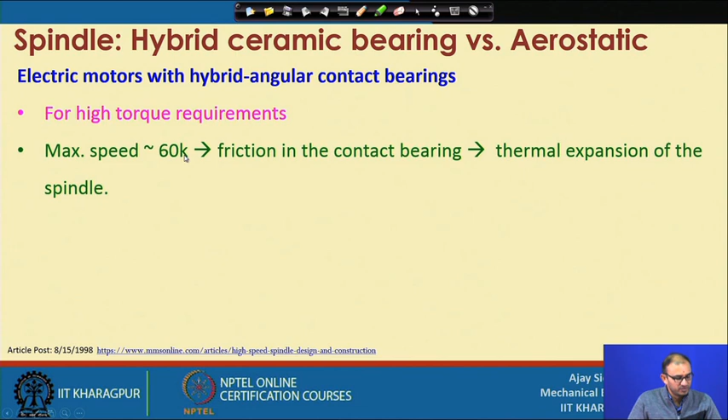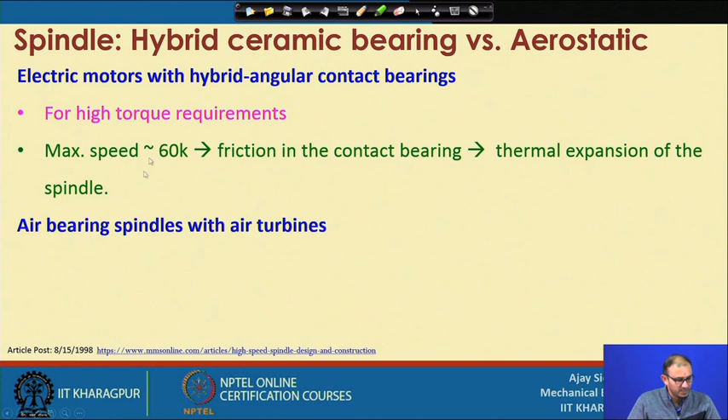The issue here is that we can mostly go up to a maximum speed of 60,000 rpm, because even though there is less contact, there is still some contact. Whenever there is contact, be it line contact or point contact, we always get friction, and that friction in the contact bearing creates a problem when we go with rpm more than 60,000. The problem becomes related to thermal expansion. The thermal expansion of the spindle will occur, and because of that you may not get the required accuracy in the machining process.

What are the advantages here? You can go with a speed of 2 lakh rpm, even spindles up to 5 lakh rpm. It's still under research, but somebody somewhere reported they have already made this type of spindle that runs at 5 lakh rpm. But it produces very low torque, because when you go with extremely high rpm, you have to sacrifice torque. Still, that torque is enough for micro machining operations, because our depth of cut is very small, we use a very low feed rate, and our rpm is very high. So in this case, low torque should not be an issue. We can use aerostatic bearings or aerostatic spindles for machining different kinds of materials.

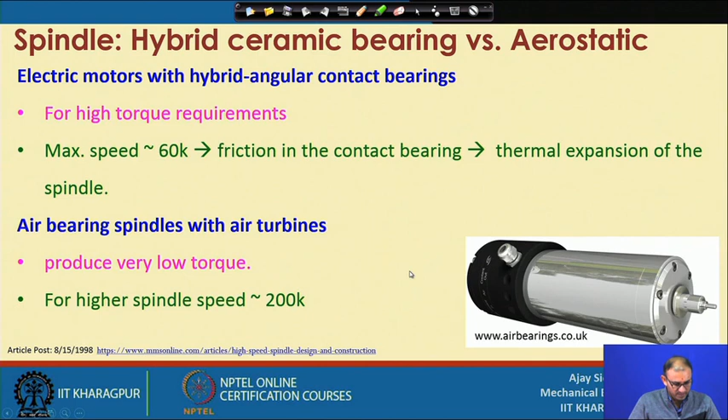So this is the most often used spindle for high precision machining tools, mostly called aerostatic spindle. Why is it used? Because it has high motion accuracy and is capable of high rotational speed.

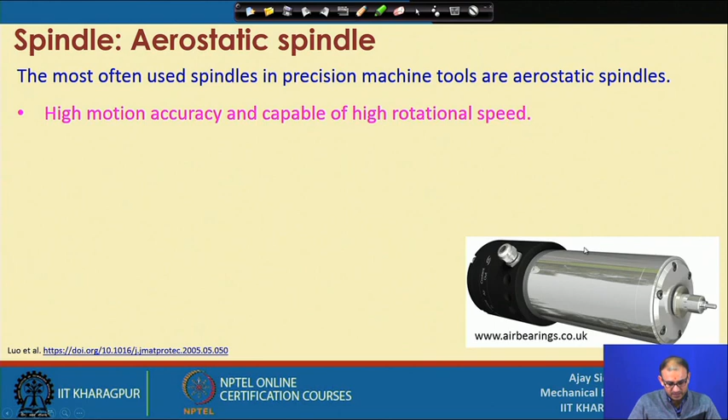We have seen that because of that air film, you are not able to get any contact between the two relative motion surfaces, and because of that there is no wear and tear of any components. You can go with a speed depending on the supply of air and the other accessories attached with the spindle. So your requirement for high rotational speed is fulfilled by this particular aerostatic spindle.

It has lower stiffness than the oil hydrostatic spindle, because there the oil is highly viscous, so you can play around with very high stiffness. But that low stiffness is not really an issue, because it has much lower thermal deformation than the hydrostatic spindle. This is one downside of this spindle compared to hydrostatic, but generally we do not go with the hydrostatic spindle in high speed machining or micro machining centers, because its load carrying capacity is very high, but in our case that is not an issue.

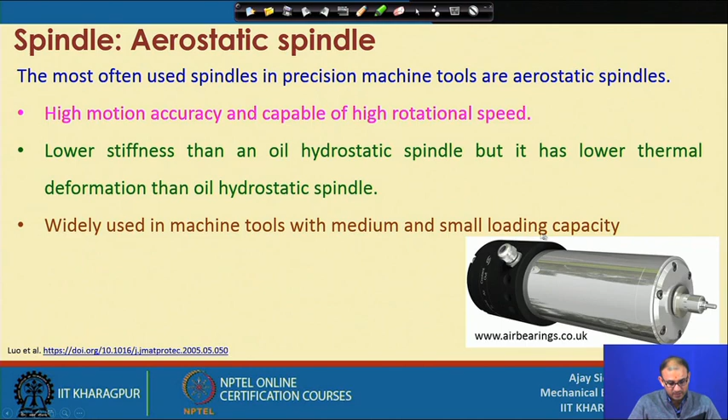So it is widely used for machine tools with medium and small load carrying capacity, because that is where our micro machining field fits in, since our load is not very high but considers medium and small load capacities.

Now let us see what things are there inside it. This is one particular aerostatic spindle, and the tool is attached at this location. These are the different openings by which you can supply the air, and other than the air supply you also have to apply cooling in some locations. So you get different parts, as well as an electrical connection. Some of these are the wires for rotating the motor, which is actually built inside this particular spindle.

This is the circulation channel or passage for the air supply. Here you can see the air is actually going up to the nose of the cutting tool holder. It is also possible to cool this area or create some type of sensing element here, and this remaining part is given for the air bearing, which is located at this location.

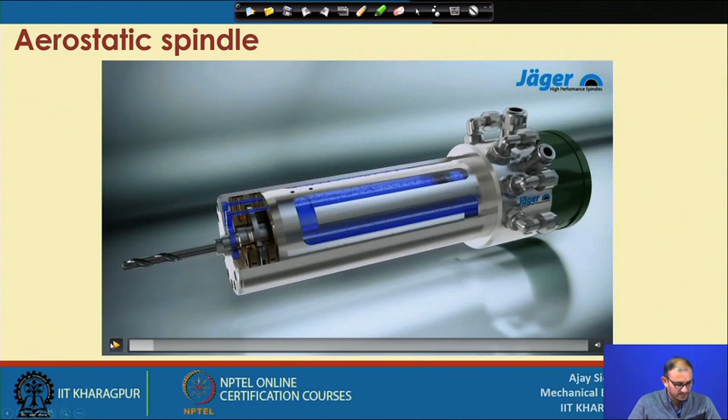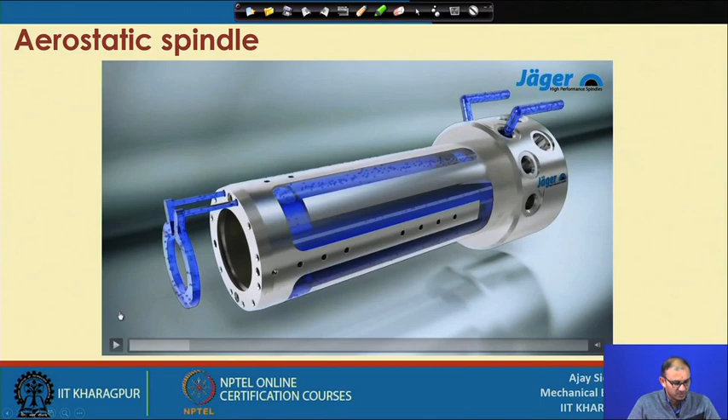So you can consider this as a closed loop continuously, because you can see you are not actually dispensing this air into the atmosphere. In one direction, you can say this air is going inside the system, and in the other way, this air is going outside the system.

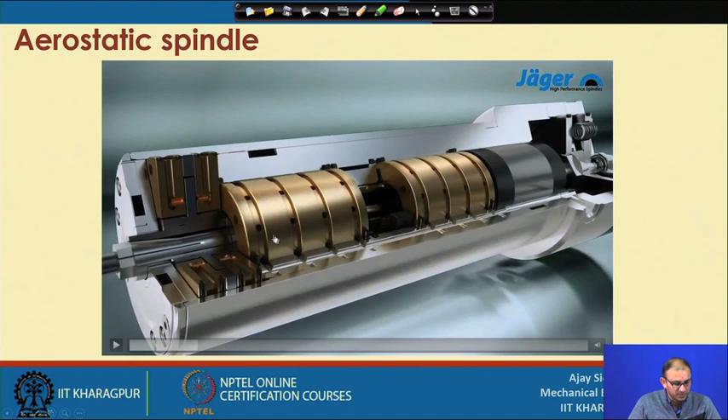Now you can see you will not find any type of ball bearing or any other type of bearing, because this bearing is an air bearing. So instead of balls and other things, you will get some passages here, through which whatever air is coming into the system will pass through these particular sockets or passages, and then it will create a uniform pressure around the shaft.

So this is the passage for air. Now you can see air is going through these particular passages, and wherever there is an opening, through this opening it will enter radially towards the shaft.

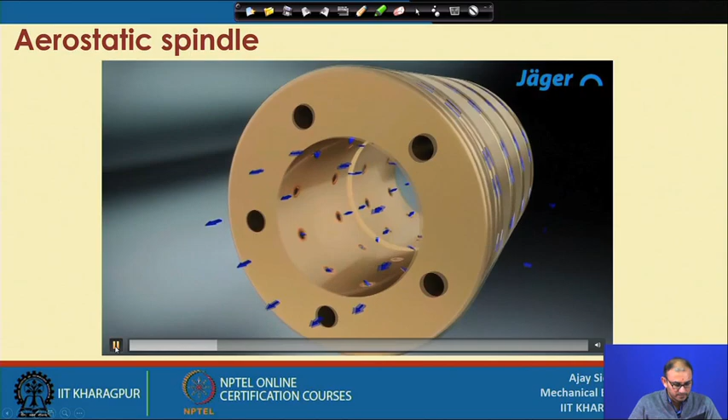This is the inside view, and you can see here this is the inlet and this is the outlet, meaning it is a vent. This vent again goes through this particular outer periphery, and then it is collected through that pipe, which was shown a few seconds before.

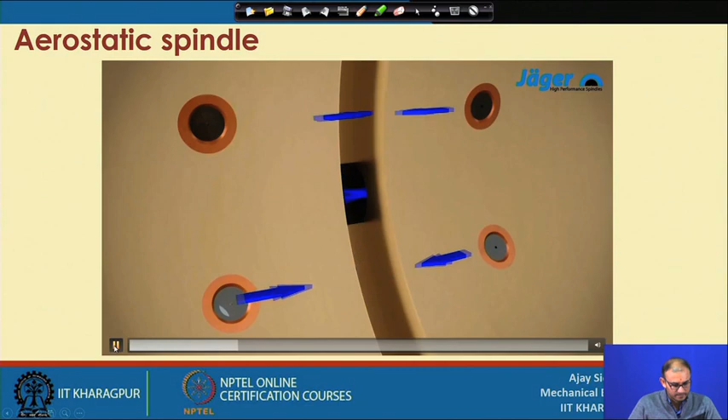So this is the side view. Now, as we have seen a few lectures before, it has very high radial stiffness. Suppose your tool is located here at this location, and you are getting a force from this direction, so you are moving in this way. So you are getting force here in this direction.

So when there is a force, now you can see right now whatever air is coming through has the same color, meaning blue color, so it has the same pressure on both sides, the top side and the bottom side.

Correct. So it does not have so much variation, but when it is under operation, you may get a radial load in different machining operations. So at that time, what is going to happen?

Right, so now load is increasing in this direction. Now you can see whatever air is coming from this location, it is in red color, that means here you are not getting enough area.

So we know that pressure equals load by area. So here area is reducing, because of that your pressure is increased in this location. But when it is going down, you can see that here area is increased, so because of the higher area...

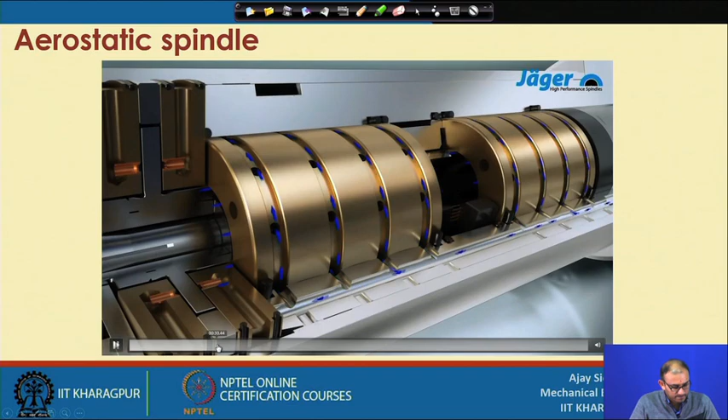Right, so because of that problem, what is happening is that you will get... because of that again the shaft will go to the central position, again it will try to stabilize the pressure on both sides.

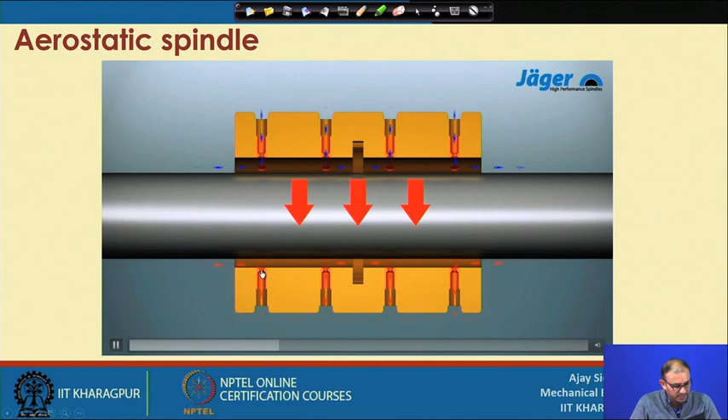So this is the top view, that means from the bottom of this cross section - it is an axial cross section here. So again if it is from this lower direction, your shaft is moving towards down, then your pressure will be different here.

So on the upper half there is low pressure and lower half there is high pressure. So whatever these red color syringes or nozzles are showing, this will create more amount of pressure here, and this blue color has less pressure.

So because of this pressure difference, again your particular shaft will be in the central position, so that you can avoid this particular pressure difference.

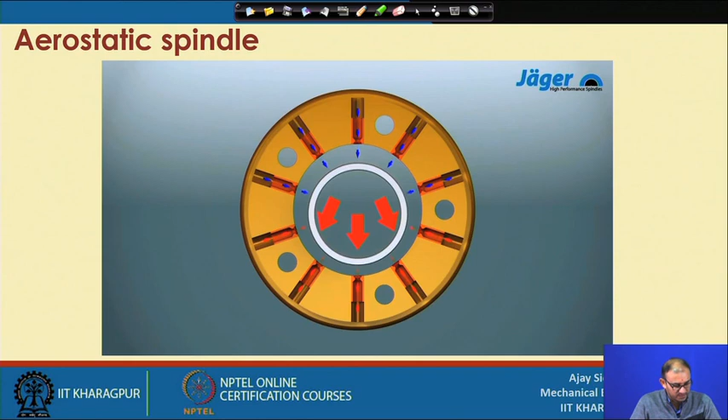Correct. So this is the way actually you will get the radial stiffness, and we know that this radial stiffness is very important when you do a milling operation.

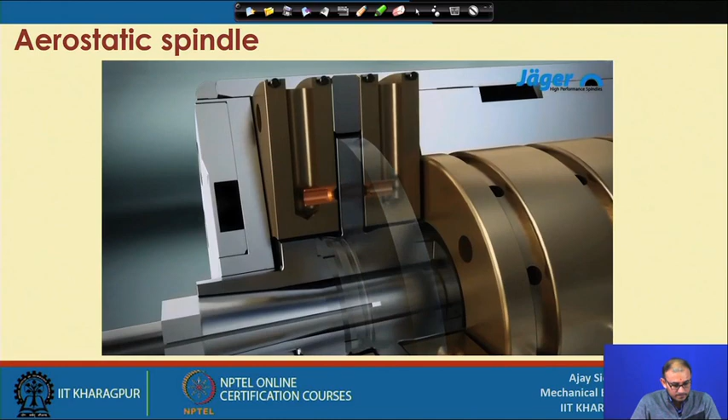Now we have seen here that it was radially aligned, so radial stiffness was very high. Now this is about the axial stiffness, because when you want to drill something, you are plunging your tool into the workpiece. So it has an axial movement in this direction. Let us see how it will compensate for the axial movement.

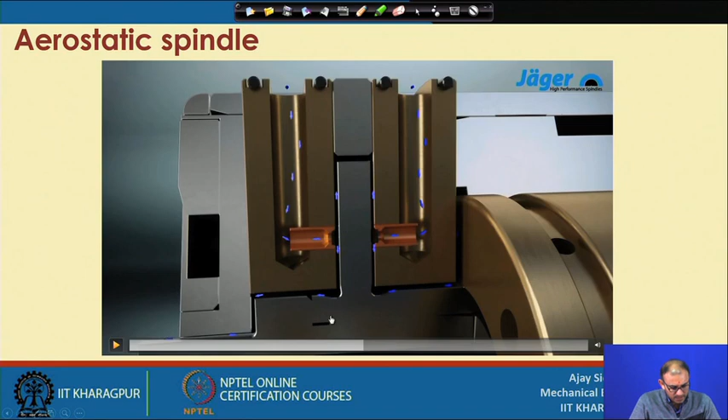Now see here, this is the thing which is attached with the tool holder. So this is part of the system which is coupled with the spindle system, and this air supply is coming from here, and then it is dissipated from these two directions, right.

So this is the open position where the air is actually creating a film between these two systems, on the spindle side and on the tool side.

So now we have to say that when this particular component moves to this side, right side or left side, depending on that it will again destabilize this - that means there will be a pressure difference similar to what we have seen just now for the radial direction. The similar thing will happen in the axial direction also.

Right, so now the tool is moving down, at that time you can see that here the gap is less now. So your pressure is very high in this direction compared to this right side, so left side pressure is higher than the right side.

So again it will stabilize, and now if it is moving on the right side, again pressure will be higher on the right side and less on the left side. So again it will be stabilized at the center.

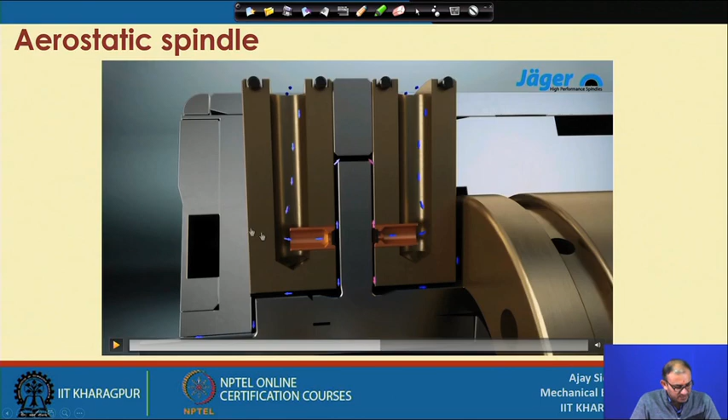So this is how it is happening. This way you can control the axial stiffness also, that means wherever there is axial loading or radial loading variable, at that time you can compensate those things within the system without actually damaging the component of the bearing as well as spindle.

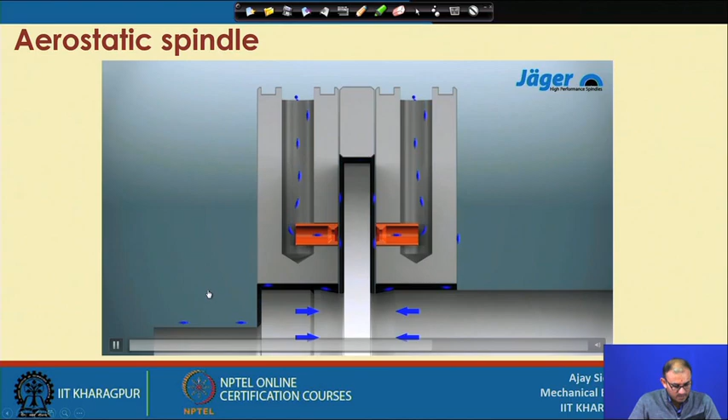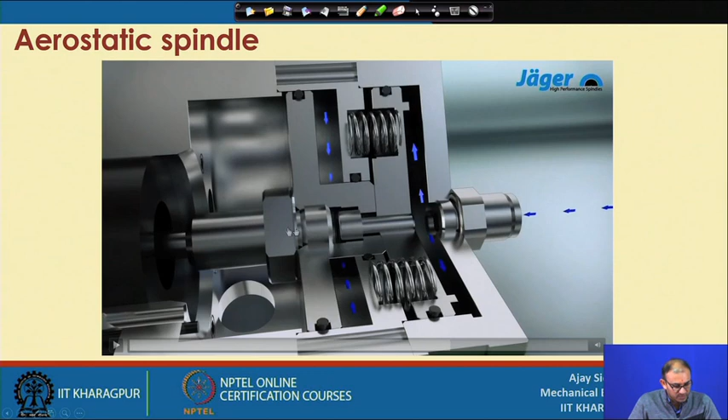Correct. So, this is the way it works in this case. Now, this is the drawbar mechanism, because in the drawbar mechanism you can actually see these two springs which make sure there is uniform pressure when you are holding or releasing the tool. So, when it is pressing this particular drawbar, this is the drawbar and this is the plunger which is pushing this part.

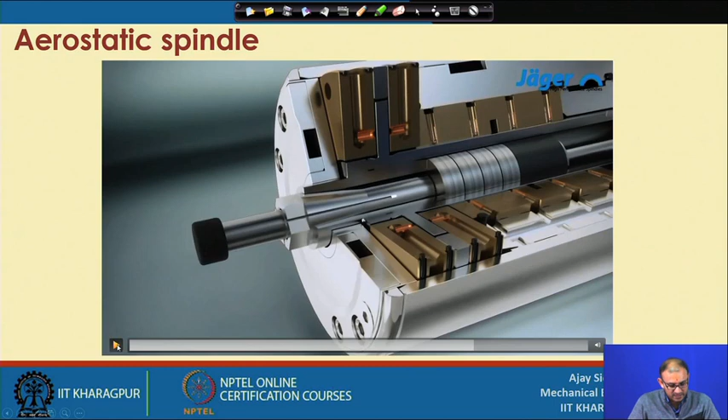So, when it is pushing, at that time it will release this particular gripping, and it will be expanded, and then you can remove your tool from this location. So, this is the expansion, and then you put it again and release that plunger back to the original position. So, again it will grip this, and this particular thing will be gripped with a different tooling system.

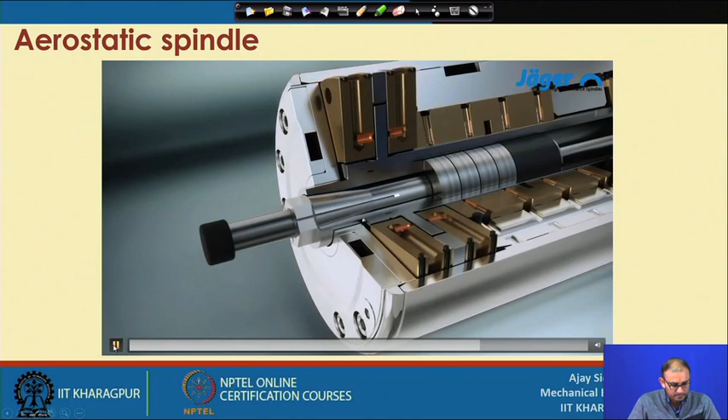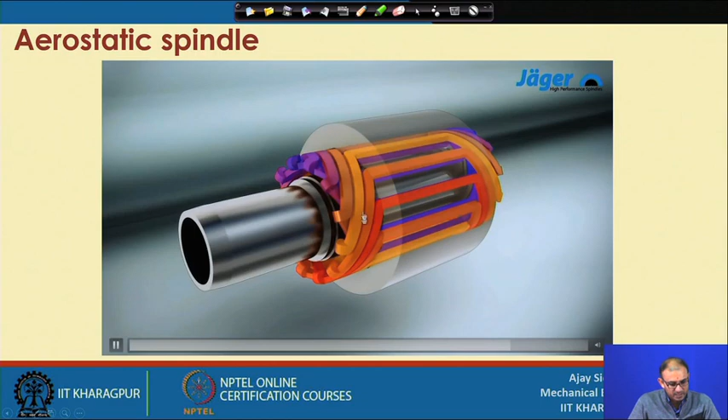And this is the motor, because we know it is an integral motor type of spindle, you do not have an external motor passing through the belt drive. So, here this particular motor will give you a rotational motion.

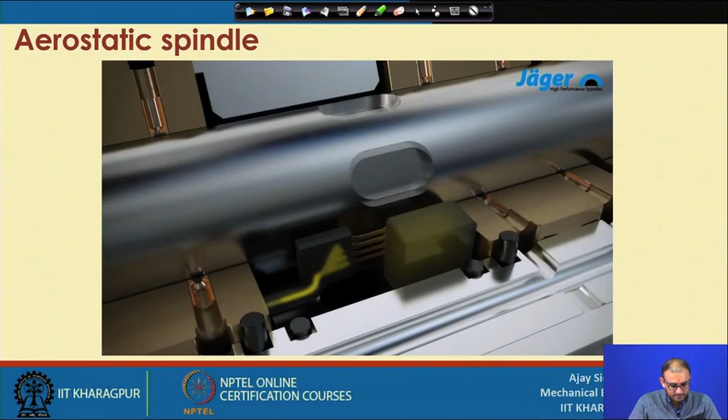Right. So, this is all about the aerostatic spindle. But there is still one problem in the aerostatic spindle also, that is called spindle warpage. There are a lot of passages through which air is coming.

And this was the shaft. So, air was coming from this. Now, consider when air is coming, at that time we know the shaft was in motion, that means it was in a rotational direction. So, the shaft was rotating in one direction or the other.

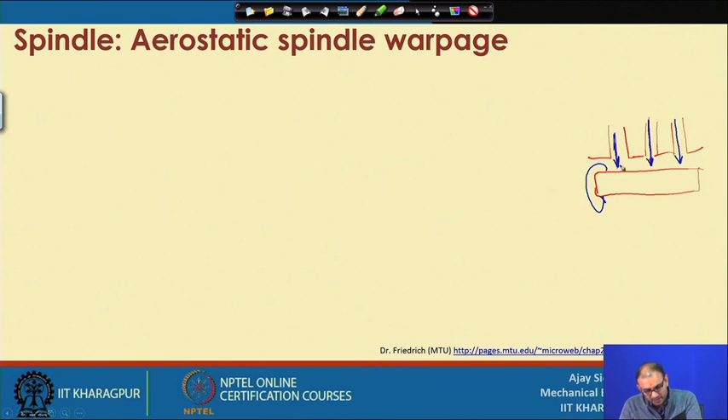So, wherever this air is plunging or striking, the surface was variable, that means every time it is getting a new surface here, and whatever air we are using here, this air is very cold and compressed, because we need completely dry air without any type of water content or something. So, mostly it is cold and compressed air that is coming.

So, when it is striking continuously onto the spindle, what is going to happen is that this particular area will become very cold. So, these are the cold spots.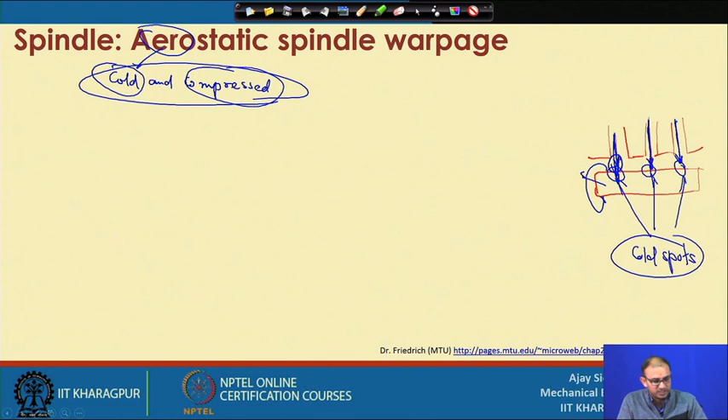If that is the case when the spindle is not in rotation condition, it is not rotating, it is in stationary condition. So, let us see what things will happen and how this warpage will create a problem, that when the spindle is motionless for a prolonged period with cold air impinging onto the same location, that is what is happening here. So, at that time, the differential contraction among the locations in the spindle takes place, causing the spindle to warp.

Because of that, let us talk about the single case only. So, our air is coming from this, and this is our shaft, right. So, it is continuous, it is not rotating.

So only this particular location is under very low temperature, rest of the thing is mostly stabilized, because whatever temperature you are using for the system, that will be the temperature of this particular shaft, since we are not rotating it. So these type of points are many, because if you consider 360 degrees and put 8 or 9 points, at every point your shaft will be under this type of temperature difference, and remaining portion will be at the same temperature.

So that is what we are looking from this part. If you see this particular thing lengthwise, we are putting one point here, this is the other way, and this is probably the third way. So this particular portion does not have temperature variation, but these are the portions where you will get temperature variation. So because of the large variation in temperature at different locations, what is going to happen is that your spindle will warp.

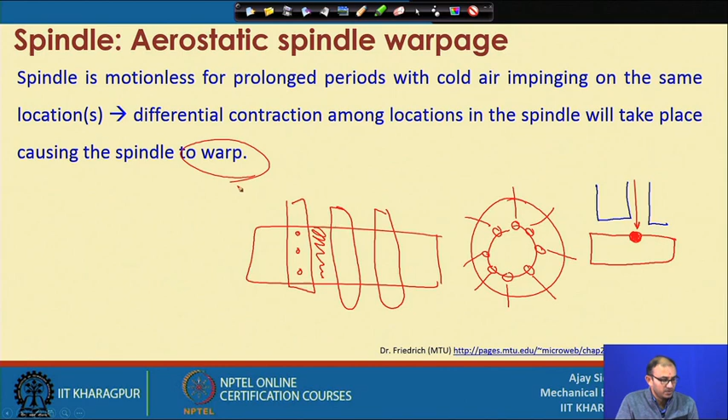So what is the problem because of that? Out of roundness motion due to the bending of the spindle, because we know that when making an aerostatic spindle, the dimension control is very tight. So if you continue with this, you are not getting a straight shaft, meaning you are not able to maintain the dimension of the spindle. At some locations you will get out of roundness motion, and also a localized reduction in the size of the spindle, which will alter the interior clearance and stiffness.

So because of that, because you are localized cooling it - we are not heating locally, but we are cooling locally - and the remaining portion stays at system temperature, you are getting temperature variation. And we know that the thermal coefficient of expansion is different for different materials, and that plays an important role in how much expansion or contraction occurs per degree centigrade change in the system.

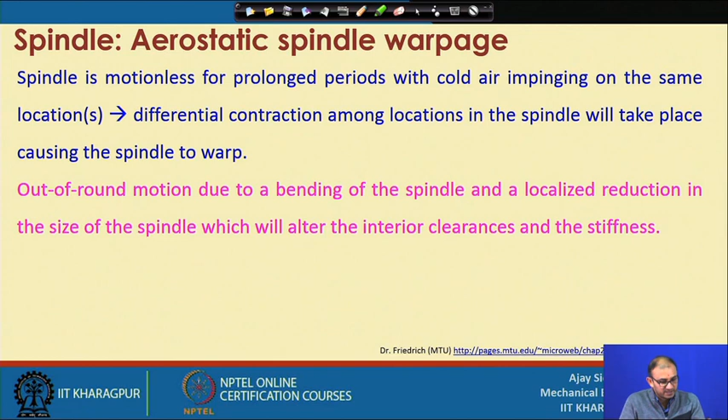So what should be done in this case? Suppose your idle time is very high, meaning you do not want to use the spindle for a long time - then it is better to shut off the air supply. And if your idle time is not very high, then you can actually provide a very small amount of rotation to the spindle. So you continue the air supply, but rotate the spindle at a low RPM even without doing any operation, in the case where idle time is low.

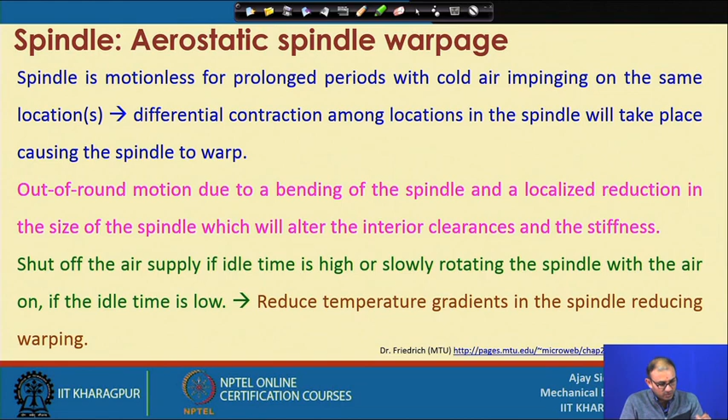So in both these cases, what you can do is actually reduce the temperature gradient in the spindle, and reduce the warping of this particular part. So that is one thing we have to take care of during the use of an aerostatic spindle for different micro machining operations, because even a few microns here and there will play an important role or create a lot of problems in the micro machining features.

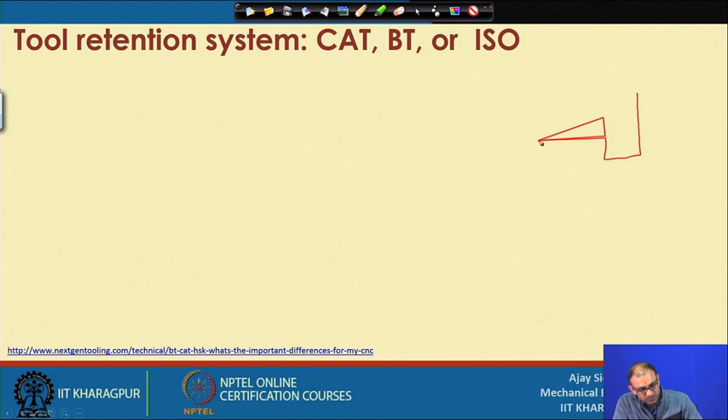Now coming to the tool retention system - what is the tool retention system? That means once you hold this particular part, now we know we have all the things, that is the bearing is also there. So this is the system, and this is the tool holder, and this is our tool, correct.

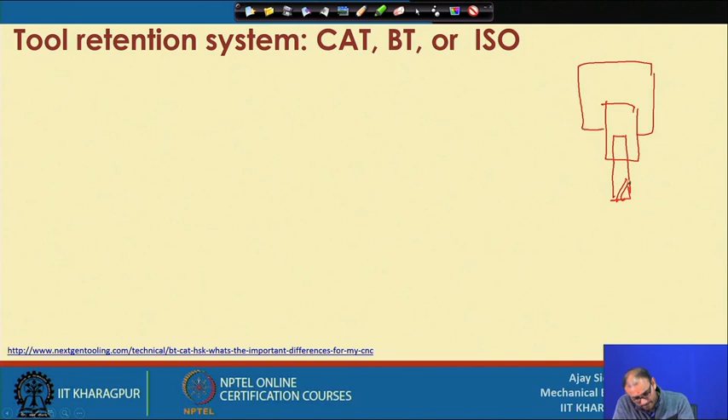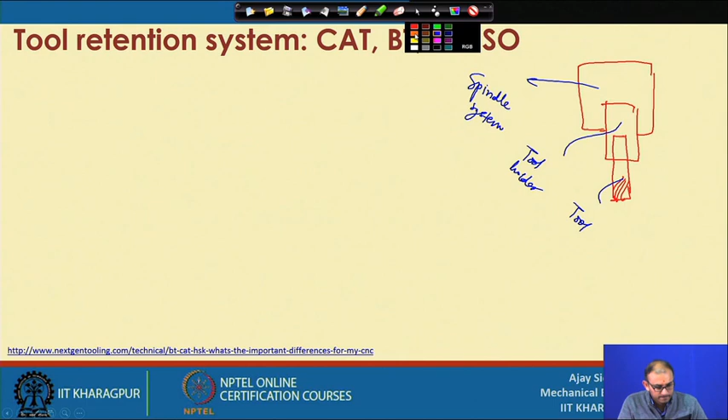So now there are three locations where we need a joint. Let us consider this is the spindle system, this is the tool holder, and this is the tool. So what things are there? This is the one joint where the tool is actually gripped inside the tool holder, and the tool holder is again actually inside the spindle system.

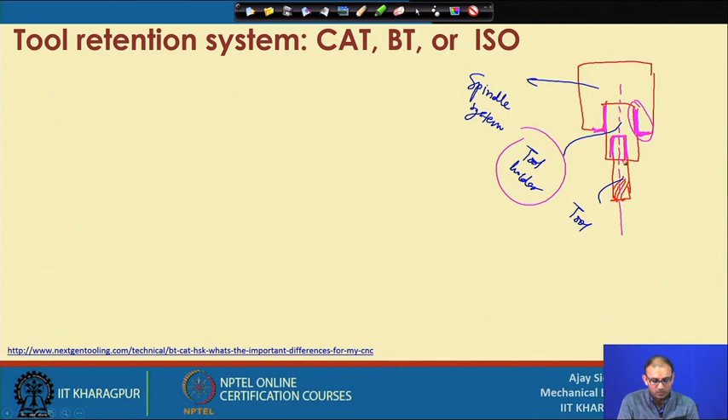Now what is the run out of this particular thing - that also creates a problem for the precision or accuracy at which you are holding this system. Now if you consider that this particular thing is exactly concentric, meaning this is the axis of the spindle system, and you are putting the tool holder in that, both things are matching - but from tool holder to the tool it is not matching, then you will get run out, the tool run out. So in this particular case there is a problem.

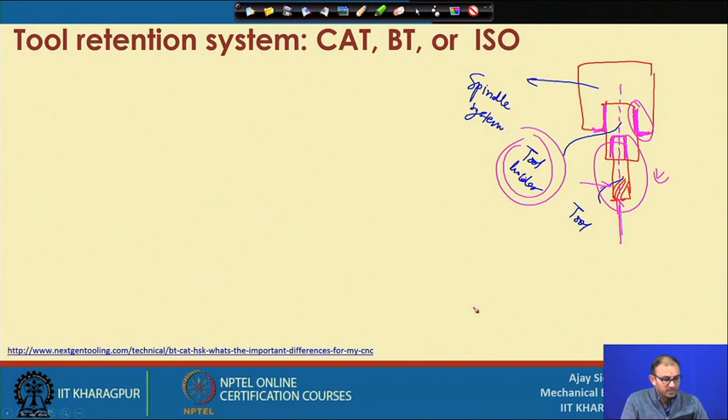Even if both things are working fine, there can still be a problem in the tool holder fitting into the spindle system, causing a large amount of tool run out. How accurately you fix this is one issue, and once machining starts, you get different types of forces in different directions, so how the system behaves under dynamic conditions matters. How perfectly you grip the system from spindle to tool holder, and tool holder to tool, determines how accurately you can make a part with dimensions in tens of microns. Let us see the different types of retention systems, to understand which is better for micro machining.

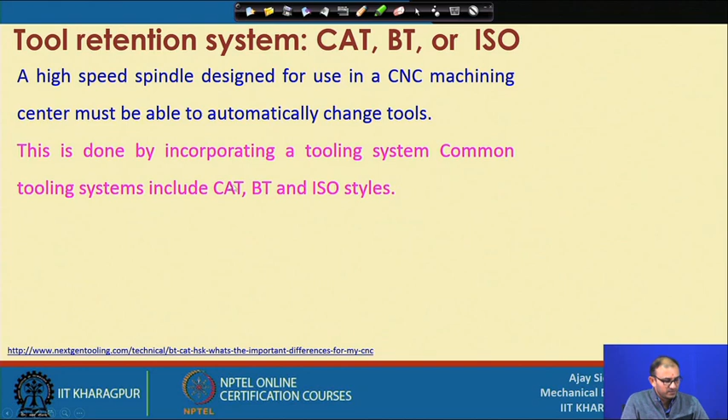This is the CAT, BT and ISO system, a very routinely used high steep taper and high speed spindle designed for use in CNC machining centers, which must be able to automatically change the tool. This is needed because we often require a tool change to create different dimensions or features onto the surface. This is mostly done by CAT, BT and ISO, three different standards by which it is defined, and these are well known.

So there is a high steep taper. Here, the whole thing is actually such that your spindle is located at this location, and it also has a taper. This taper matches the tool holder taper, and then it is pulled by a stud. This way you get the insertion of the tool holder, and the tool is attached at this location. These are the CAT, BT and ISO type of standards.

Generally the taper is 7 by 24. What is this 7 by 24 taper? Suppose you have a length of 24 inches; within that 24 inch length, the taper is 7. So consider this L is 24. Whatever taper you get here, this taper is 7, so this is 3.5 here, 3.5 here.

From this you can consider this is the part, this is the spindle, and the total length is 24 with a taper of 7, which is 3.5 and 3.5. Depending on that you get one angle; mostly this particular angle is around 8 point something, because the total angle is about 16.23 or so. So you get an angle of roughly 8 degrees plus some fraction of a digit. This is called the 7 by 24 taper.

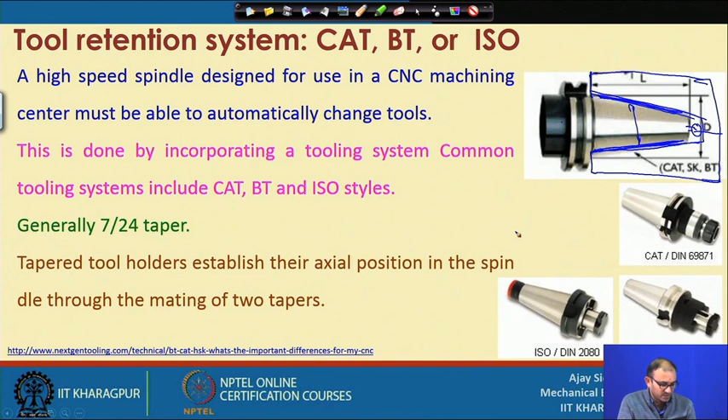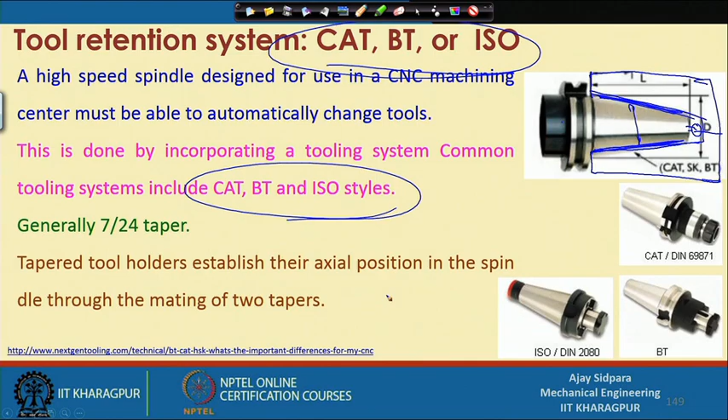Whatever RPM your spindle rotates at, your cutting tool holder will also rotate the same way. But this is mostly used for conventional applications, because when this standard was developed there was no much progress in micro machining applications. So these standards were not actually designed considering micro machining parts. We will discuss more in the next class about other standards specifically used for micro machining, which will be used for micro machining machine tools so that you don't get the problems associated with the CAT, BT, ISO standard. Thank you very much.